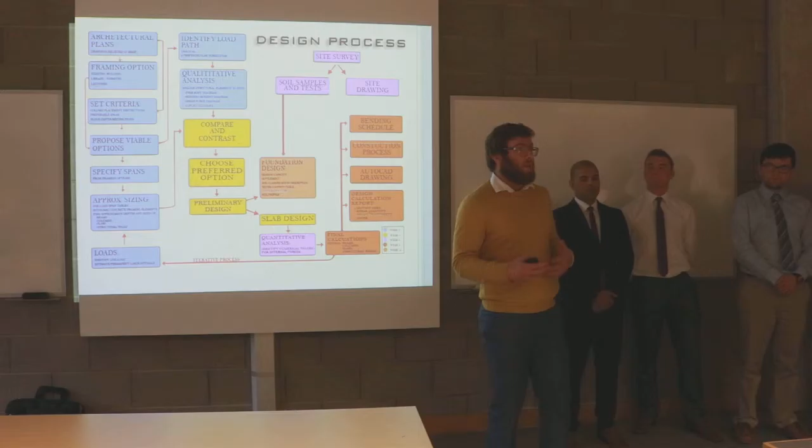We looked at our framing option, carried out a structural analysis, and emerged with bending moments, which Conor will speak about, which we used to design our RC elements. From our RC elements we had our final loads, and Nathan will speak about the geotechnical challenges of the site and our foundation design. Finally, James Beery will speak about how we tied everything together and produced outputs suitable for industry. I'll hand you over to Becky now to talk about structural analysis.

Thank you. Good afternoon, everyone. The building is a 4-story building, and the loads acting on it will be vertical loads and horizontal loads. The vertical loads will be the permanent loads and the variable loads, where the permanent load will be the self-weight of the slab, beams and columns.

There's an area on the first floor that will be used for physical activity, like a gym, so we took account of that with a variable load of 5 kN per meter square on that floor, and the other floors we took a variable load of 2 kN per meter square.

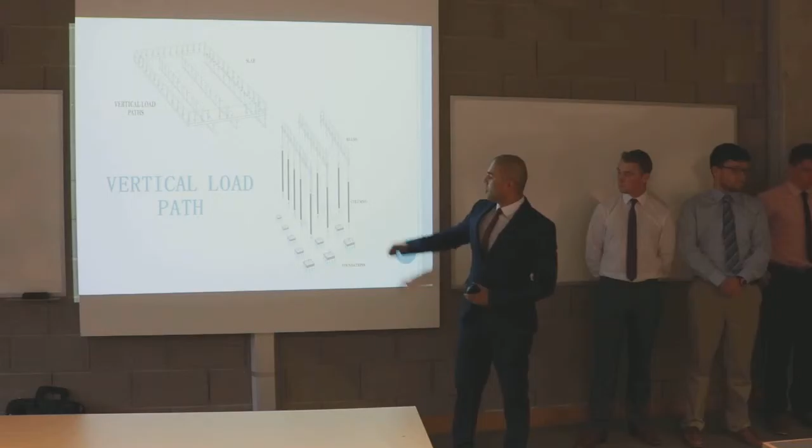As you can see, for the vertical load path, the self-weight of the building components will act on the slab, and from the slab it will transfer to the beams, from the beams to the columns, and from the columns to the foundation, and finally it will be resisted by the soil of the ground.

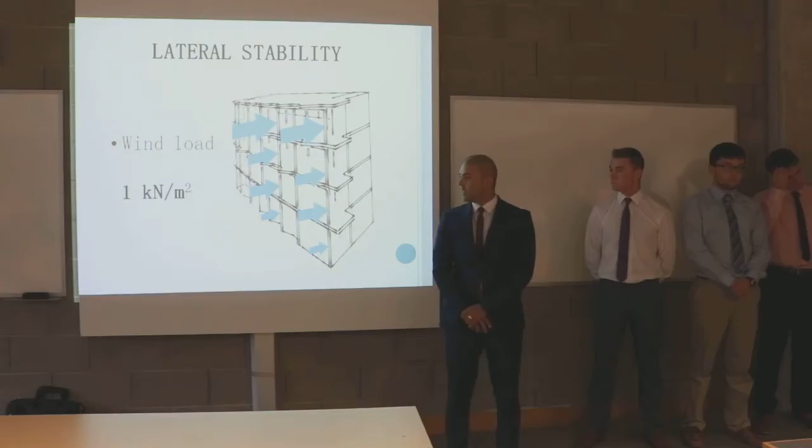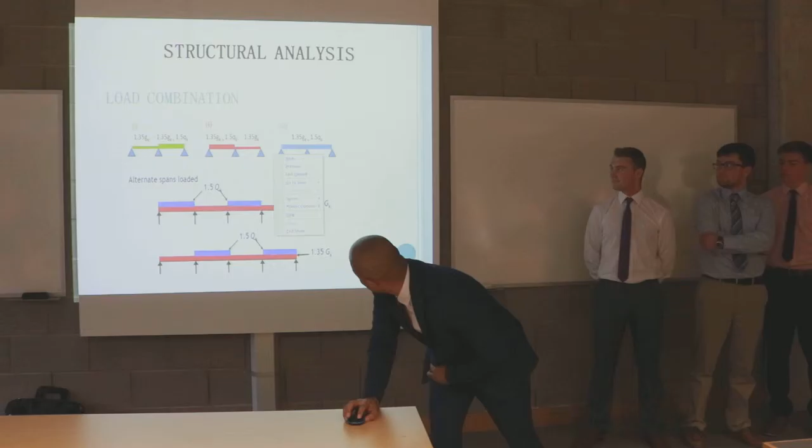The horizontal loads will be the wind loads. We assumed that it will be 1 kN per meter square acting on the building from each face of the building.

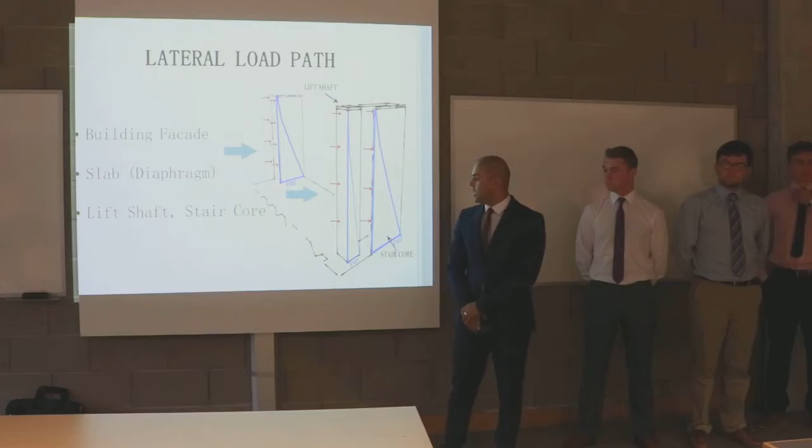The horizontal load path will be when the wind is blowing from the face of the building, through the connection of the windows, it will transfer to the slab, and the slab will act as a diaphragm and take these loads to the lift shafts and the stair core. We designed the lift shafts and stair cores to resist these loads and transfer them to the ground, where they will be resisted by the foundation and ground.

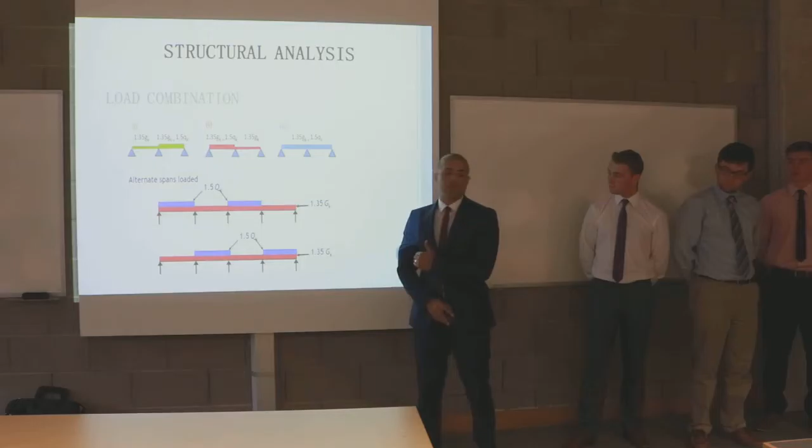We also took the load combinations for different spans of the beams and slabs, adding different load factors for the live load and the dead load to produce the maximum hogging moment and the maximum sagging moment, for the design of our beams and slabs later on.

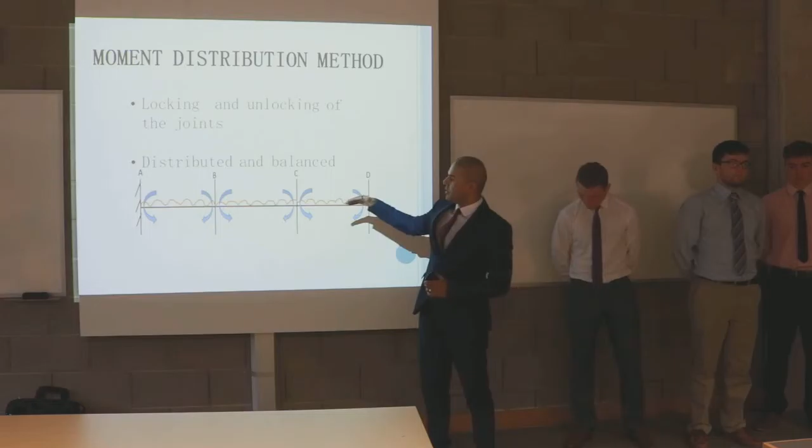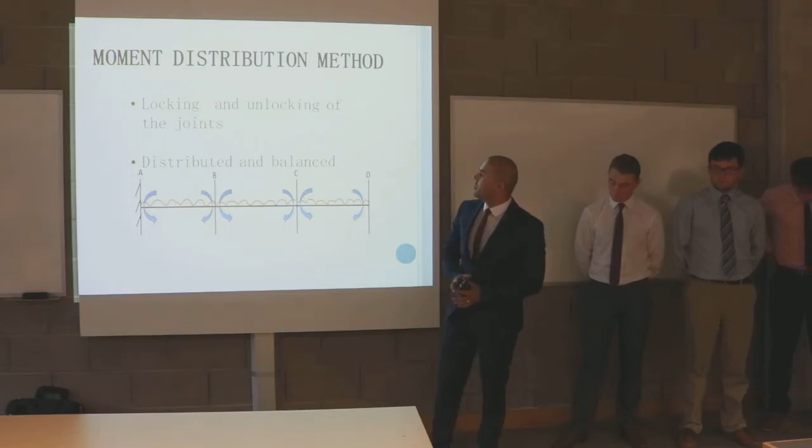We used the moment distribution method for this. Basically, it's a principle of locking and unlocking of the joints in order to let the moment be distributed and balanced at each joint to equilibrium. For example, we take one three-span section of beams, assume one side is fixed and the other three spans are pinned, then we assume all are fixed, and through locking and unlocking of each joint, we try to get a balanced moment at each joint.

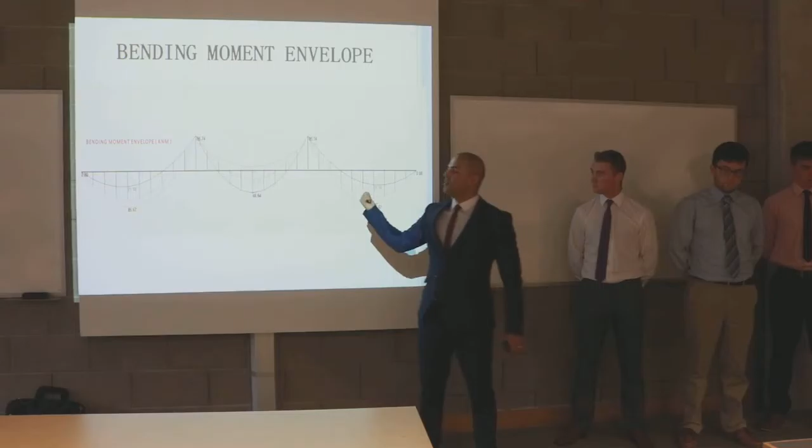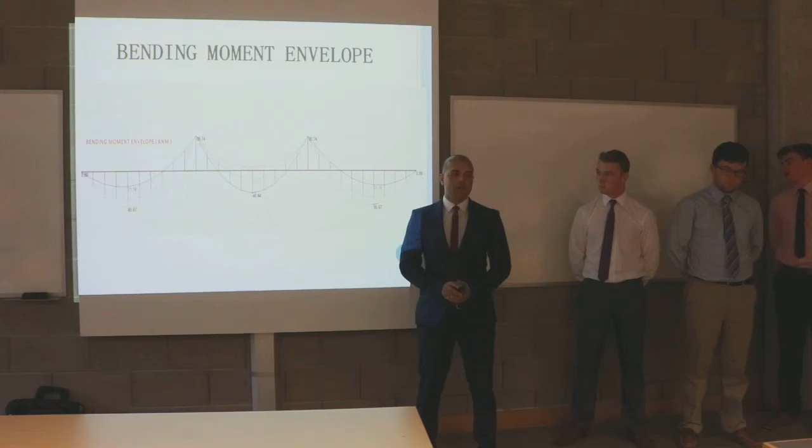Then we produce a bending moment envelope, which gives us the maximum hogging moment and maximum sagging moments. We use these later in our design for the slab and beams, and we also match this with the LinPro program we use to check if our calculations are correct.

Now I'll pass over to Conor Wright, who is talking about the structural design. Thanks very much, Becky. I'm just going to talk about the reinforced concrete elements of the design. We were tasked with completing a design for a slab, a beam, a column, and finally a foundation or pad design.

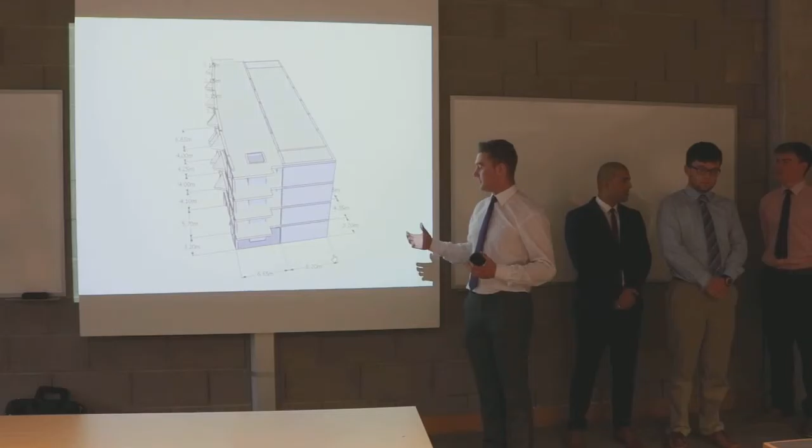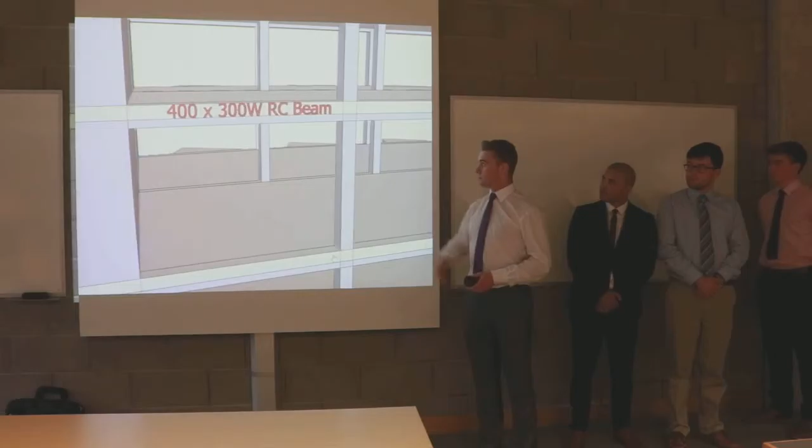So starting off with our slab, we used the loads and moment distribution that Becky just talked about, and this is the model of our building. We worked out the loads and got an area load, and considering it was our first time designing a piece of reinforced concrete, we tried to keep it simple but effective.

So we came up with a 200mm deep, one-way solid spanning slab. Following on from this, we got the area load and self-weight of the slab, and we designed our beams.

Our beams were 300mm wide by 400mm deep, a rectangular reinforced concrete beam which contained shear links and reinforcement to resist tension. Then Becky spoke a bit about the load combinations, which we used to design our column to create the biggest moment in it.

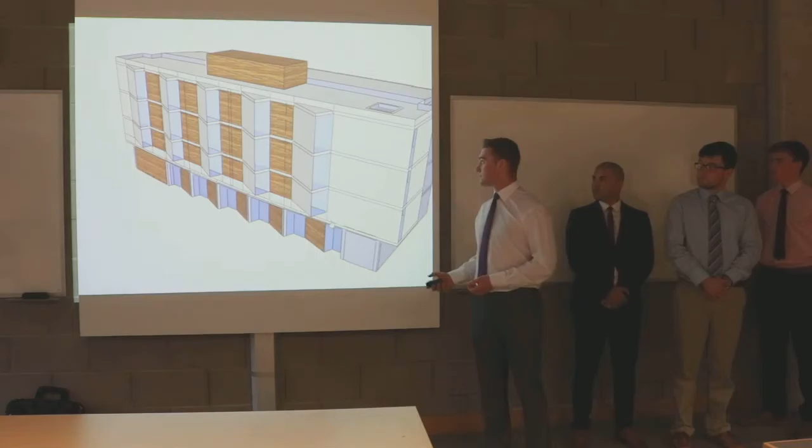Following on from that, we designed a 350mm by 350mm square reinforced concrete column, which again had shear links and reinforcement. At this point, we calculated the total load takedown, which was going to be transferred to our foundation, and Nathan will speak more about that in due course.

Throughout this process, we also had close consultation with the client, so it was our duty to outline to the client its roles and responsibilities. For example, that the client would only appoint competent professionals well capable of carrying out the job or task they were appointed to do.

Also, it was the client's role to appoint the right various personnel - us, the designers, but also the project supervisor design process, and also looking at the construction stage, the project supervisor construction stage, and the contractor to carry out the job.

The client also had to contact the Health and Safety Authority due to the scale of this project, both on commencement and if any accidents or injuries occur on site. We also encourage the client to be proactive throughout the project, because they have the most control of it and will be the end users of the building, so we want to maximise their benefit.

Looking at ourselves, we had to also upskill throughout this project. For example, surveying - we learned how to do topographical land surveying, but also levelling exercises. We presented this information through learning how to use a package called AutoCAD, which is how we presented most of our deliverables, which James will talk about a little later on.

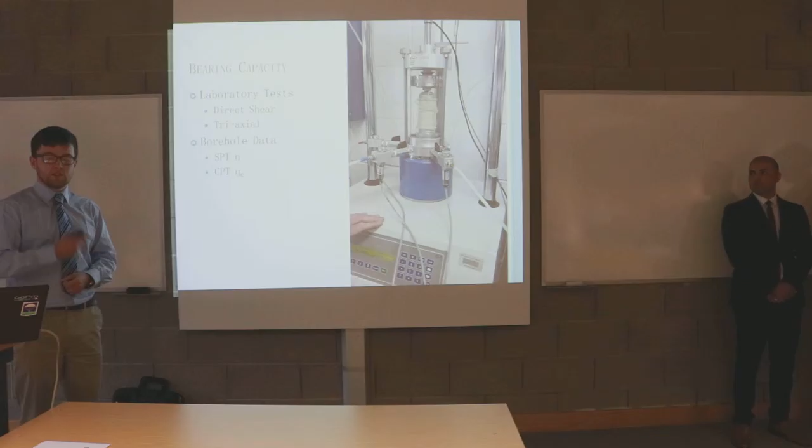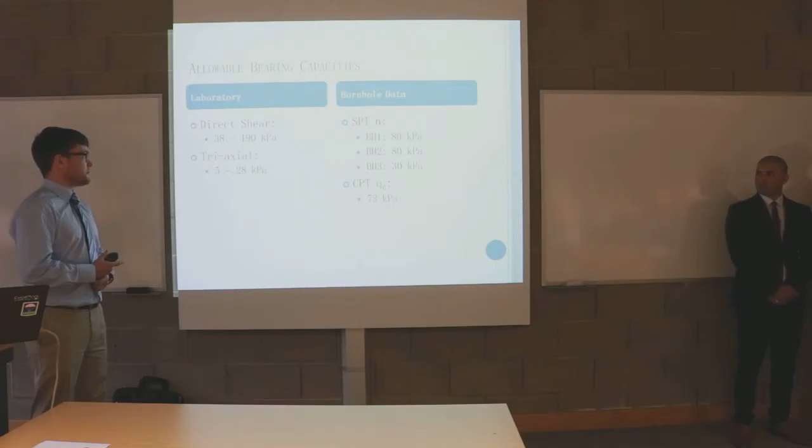Moving on to bearing capacity, there were 2 approaches to estimate it. One was through laboratory tests, such as the direct shear or triaxial - the triaxial test is imaged there. We could also use correlations from the borehole data, such as the standard penetration test and cone penetration test values. These results were tabulated, and as you can see, there's a massive variation in the laboratory results - we're going to go through why that is in a moment.

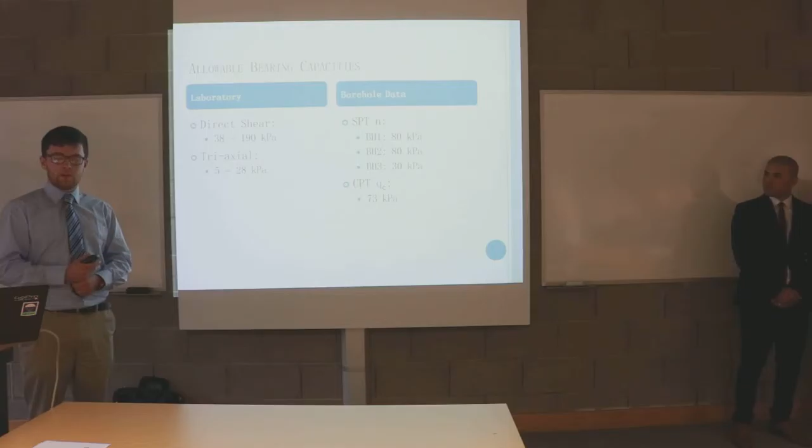But from the borehole data, boreholes 1 and 2 were consistent, and the cone penetration test was consistent with those values.

However, there's an outlier in borehole 3, and we're going to go through in a second now why that is.

The laboratory issues were as a result of using reconstituted soil - soil that wasn't from the site, which we made up by adding water and compressing it in a mould. So there's quite a large margin for error there, substantial error. Also, it was our first time doing these tests, so we weren't fully experienced with the whole process.

With borehole variations, we believe the outlier came from a strata of soil that doesn't go the whole way across, and only borehole 3 picked it up. Without further investigation, we cannot assume that is a localized area, so we have to design to the softer clay bearing capacity, which was 30 kPa.

This goes on to settlement, so we have two issues: how much is going to take place and how long it's going to take. To find this out, we did an oedometer test, where you apply a load to the soil and measure its displacement over time. This led to a total settlement of 380 millimeters with a differential settlement of 140, and a time for 90% completion of 9.5 years.

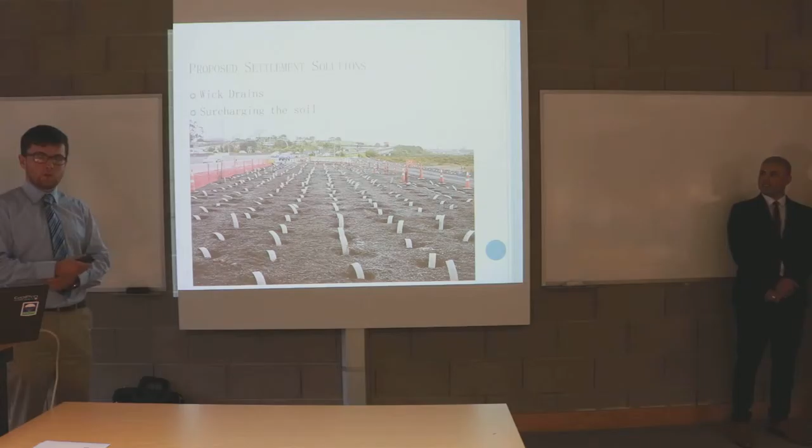Unfortunately, this is far too much in both cases - the differential settlement is far too large and it's taking too long. Some of the proposed solutions are wick drains, which are basically pipes that go down through the soil and minimize the distance the soil or water has to travel to escape. Also surcharging the soil, by putting a large layer of soil on top of it to help get rid of the water prior to construction.

This leads us to foundation design, where we use the takedown loads calculated during the design process and divide that by our allowable bearing capacity to give us a foundation area. This was too large for the pad foundation we had designed for in ORC masonry, so from a soils perspective, we concluded a raft foundation should be used.

And with that, I'm going to hand you over to James Beery, and he's going to go through the outputs.

Thanks, Nathan. Okay, so just to go back over the whole design process from beginning to end: we started off by comparing and contrasting and then choosing a scheme. We estimated the loads that acted on each floor. Using different packages such as Linpro and other methods such as moment distribution, we analysed each member and calculated the moments and forces acting on each, which allowed us to fully design and calculate the reinforcement needed and the depth of each particular item.

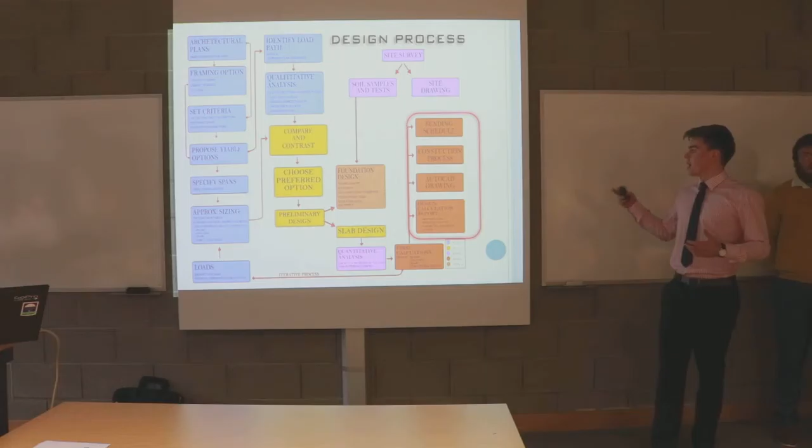Once we had the slab, beam and column designed, we could calculate the total loads acting on our foundations. Using our soil data, we estimated bearing capacity and hence designed a foundation. Once we had the full building designed, we had our 4 main structural members completed. We then had to think about how we would represent this information and deliver it to a contractor so it could be constructed on site.

So the main outputs we came up with were a bending schedule, a construction process, and AutoCAD drawings that contained scheme layout drawings and reinforcement drawings.

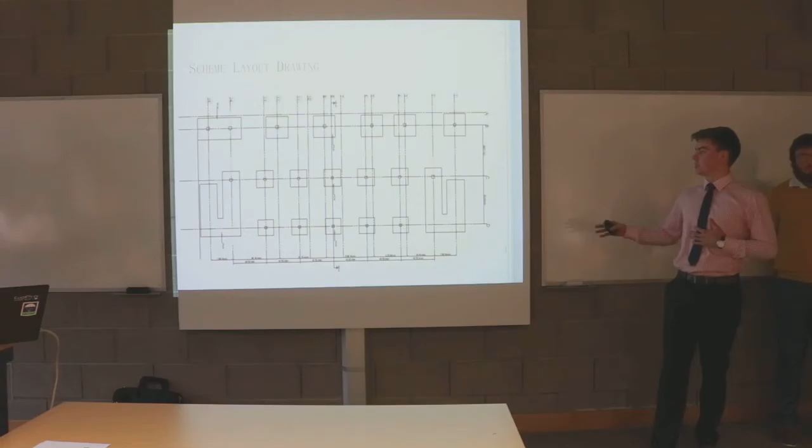The first was a scheme layout drawing, which is a plan of our foundation setup, showing the plan area dimensions of each foundation and the distance between each. Then there's the section through that foundation drawing, which shows the depth below ground at which the foundations are laid, the amount of backfill required, and also the slab-column interactions.

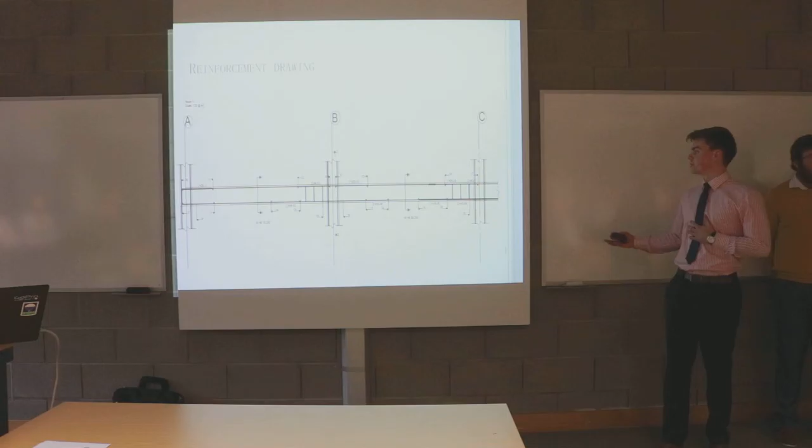The bending schedule contains the amount of reinforcement required in each individual member, the diameter of the bars used, the number of bars, the shape code, and dimensions of each part. A reinforcement drawing then goes hand in hand with the bending schedule to show where each bar is located, with lap lengths and anchor lengths all included.

One question we were left to ponder towards the end of this project was the geotechnical aspect. We were wondering, are geotechnical factors of safety excessive? We spent weeks doing laboratory tests on our soil, using empirical data trying to get a bearing capacity. Once the bearing capacity was calculated, we then used a load factor of 3 to design the bearing capacity we'd use for our model. We're just wondering, it's a lot to go through to then just put on what we thought was a large load factor, and design with that bearing capacity.